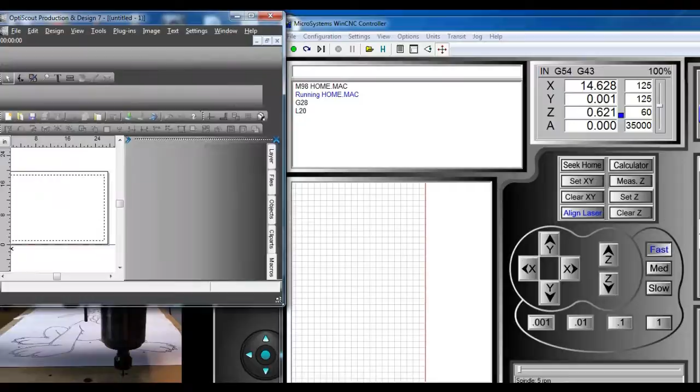Hi, this is Mike Queen from WinCNC, and today I want to talk about a program called OptiScout. We support this. This is a vision registration system.

This is where you would take a camera and locate registration marks on a print, and that would give you the placement of the item that you're going to cut. And you can see here I can twist this all around and position it, and I'm going to do that here in a minute. First thing I'm going to do though is just leave it straight.

I've got this tiny little tool here. It's an 1/8 inch V-bit, very sharp, and I'm going to use that for a pointer. I'm not actually going to cut my paper. I'm going to trace around it with the point on here.

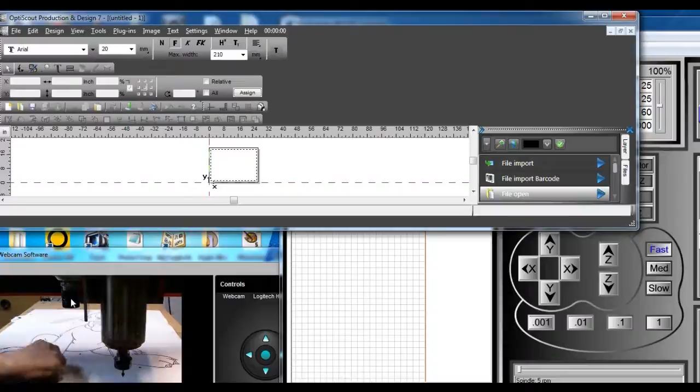After I find these reg marks, it's going to pick 3 of these reg marks and use them for placement. And then after I find 3 of them, it will determine where to lay out my outline for this, and then it will go around and trace over top of that outline with this tool. Then I'll twist it around at an angle and do it again. Wish it was a little smaller because I could get a better angle, but this will do to show you how it works.

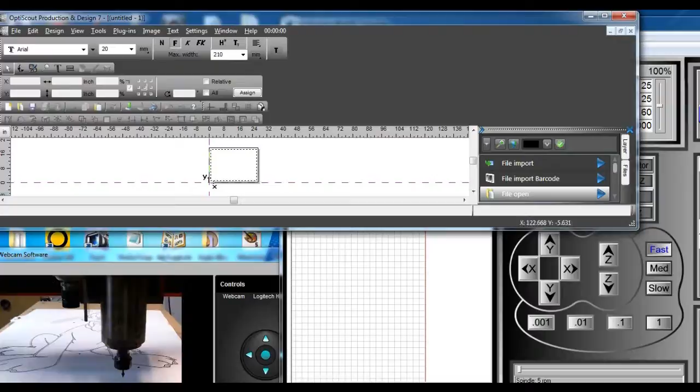So the first thing I want to do is to load the file that I want to use. So I'm just going to go to open file, and I'm going to grab this one and click it, and all this is an outline of the object that I've got down here, of this drawing.

And I'm going to use the camera to go around and find 3 of these reg marks, and then OptiScout will know where to place the toolpath for this, and then it will go around and simulate cutting it out. I'm not going to actually cut it out because I want to keep this drawing.

I would normally have set my tool at a real diameter, like a 1/4 inch for an end mill or whatever, and done it that way, but I'm not really going to cut it out, so I set a tool diameter of 0 so it would stay on the line.

So I'm happy with that, and the next thing that I want to do is to go ahead and output it to the device. And I'm going to shrink this so that it fits better on here so that you can see all the things that are going on.

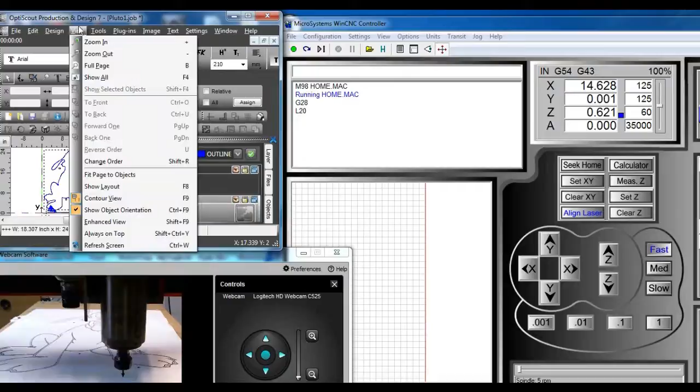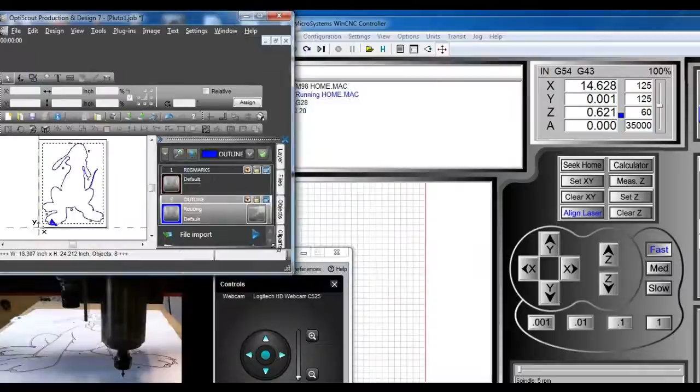Pull that back out for a second and turn off these rulers because they're taking up too much of my room. I want to shrink that down to where we can see WinCNC as it's copying, or as it's cutting, or simulating cutting.

And so now with this tiny drawing that I have here, you can still see the reg marks, and that's what the camera is going to look for on the drawing. And here's my WinCNC screen. Pull that over just a little bit more, and you should see it draw right here on the screen.

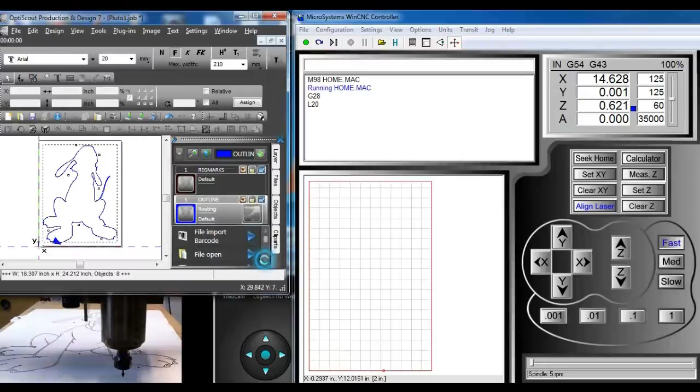Okay, so I want to output this to the file, or to the machine, I'm just going to click output, and we'll come over and look at this, and we'll look at the camera.

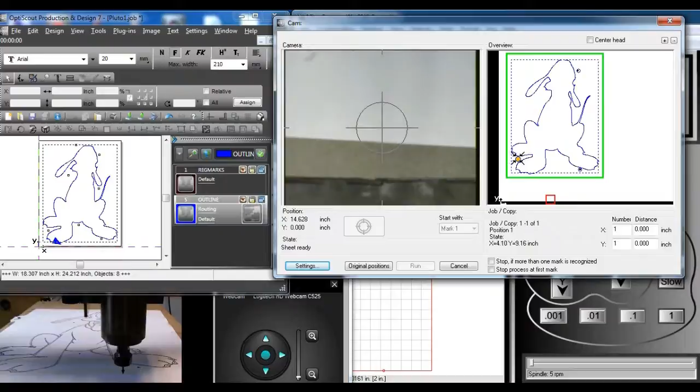And what I'm going to do now is I'm going to move it to this dot or in that vicinity. And it's closer than it was, so now I'll just take it down. And there is the dot that I want. That's the reg mark. That's a 1/4 inch black circle.

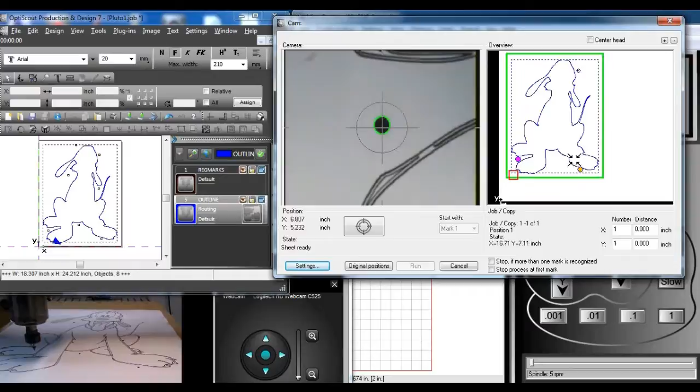When that turns green, that means it accepts its position. It knows where it's at. So now you can see that it's going to get this one over here, and this one up here. So I'll go ahead and tell it to accept that. All I've got to do is click this right here.

Now it's going to look for the other one, the next one. And it's a little bit off, so I need to move down a little. And there, it accepts that one. Now it should find the third one on its own. And there it did. Perfect.

Okay, so now all I've got to do is click run, and we should see it come up and bring the tool somewhere down in this area and start tracing around my drawing here. So I'll click run now, and you can watch it as it goes around.

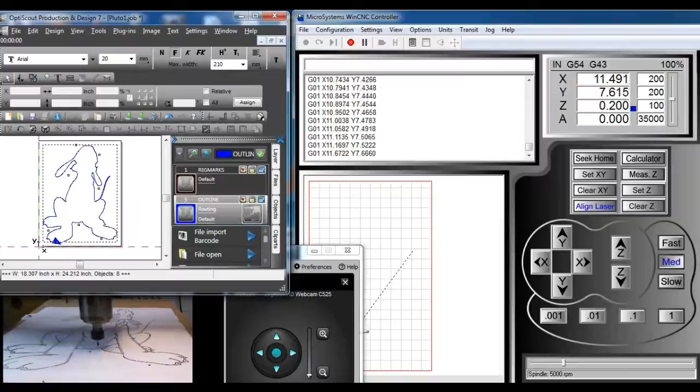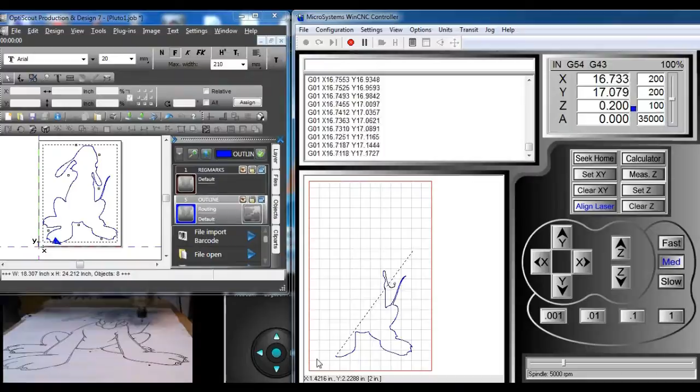I'm going to lower down right in here somewhere. You can also see it right here as it's drawing. You can see that it's tracing right around that outline of that dog.

When it gets back to here, it'll stop and lift out of the way. Now it's finished, and it was right on the line. Now, if you'll notice right here, he's leaning, and in this one, he's leaning a little bit to the right. Don't know if you can see it or not, but I think you can.

Okay, what I'm going to do now is turn this thing so that if it's going to be anything, it's going to be leaning to the left. I want to make sure that I can get it over far enough. I want to give it a good lean there. Okay, so I think that's good enough, and you can see that it's no longer straight on my table. It's very much catty-cornered, and that's what I'm trying to get across.

What it's going to do, if it does it right, is trace around it still, even though it's twisted around at an angle. When you see it finished here, instead of it being straight up and down like this or a little bit to the right, I think the head's going to be over in this area, and it's going to be angled in this direction. That's the only thing that I did, was move that around.

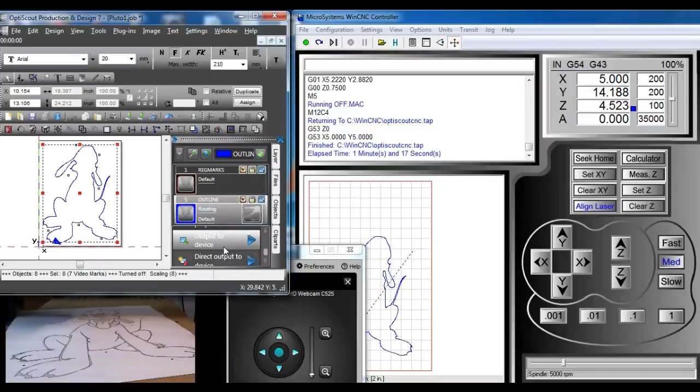So again, I want to go to output to device and let the camera do its work. Oh, I've got to select it first. Sorry, I've got to select it. Just come over here and go Control A, select it, and now I do that. And now I can output it to the device and output.

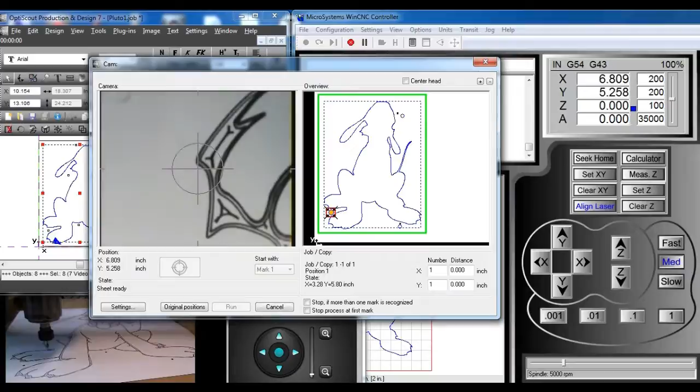And I will click here again. Camera comes down in the area, but it's not on because I moved it away. So there's my mark. I'm moving a little bit too fast, so I hit F2, then I can move slowly. Okay, so now it's located that one.

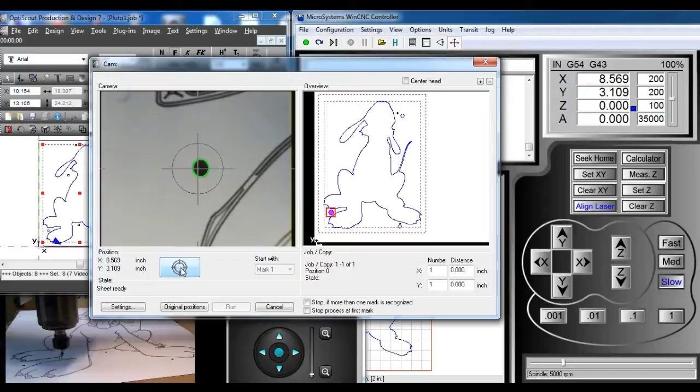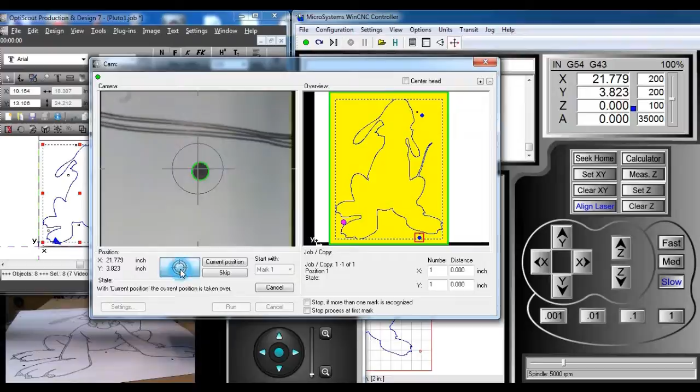It will not find the next one either because I've twisted it. And that's way off, so I need to move it up some. And a little more, and there's the second one. Now it should find the third one on its own. And it did, and it's ready.

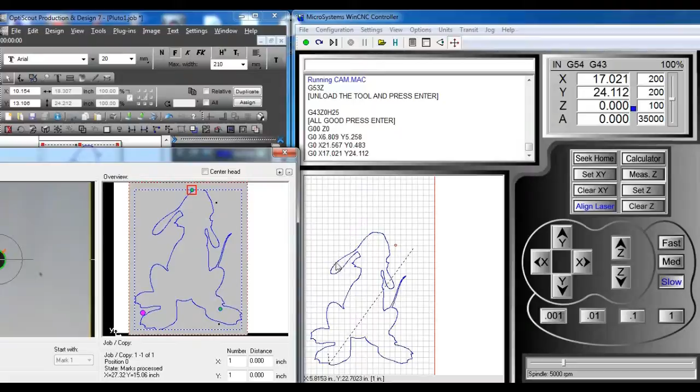Anytime it has that check mark there, that means that it's found it and it accepts that mark. So now all I've got to do is click Run. And before I do, remember, this is straight up and down, this is straight up and down. But when it's finished this time, it should be angled over in this direction. Maybe not as drastically as I showed you there, but it's going to be angled to the left instead of to the right, or vertical.

So I click Run, and now we'll come down and watch it here. And here, you can see that it's going down and it's going to trace around it, and you can see that it's still on the marks. It's still following the outline, even though I twisted it around at a pretty severe angle there.

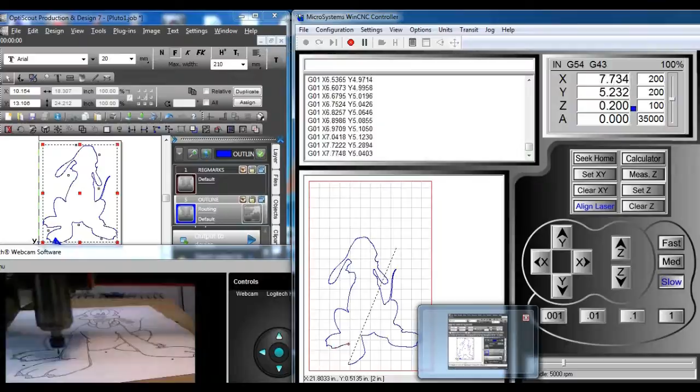It's still tracing right around the outline. You can already see that he's going to be angled up in this direction. And this is what vision registration does. It finds the reg marks, and then it can turn the G-code file in any direction that it needs to make its cuts. And there it's finished.

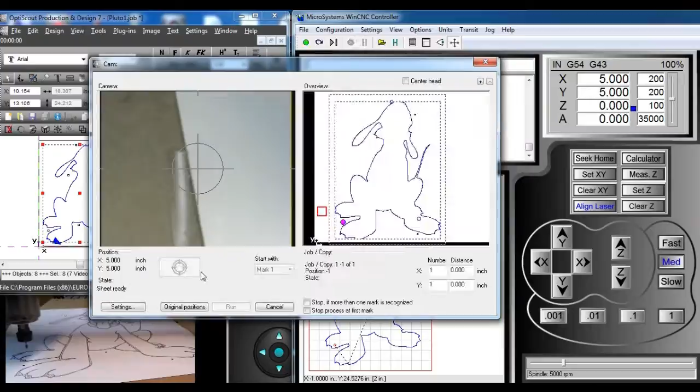As I said, it's very clear that it's angled to the left now. It was angled a little bit to the right, now it's angled to the left. So just to show you that it would do that same cut over again, I'm going to do the same one over, and now it finds that one. I hit here, it should find the next one, and then the next one.

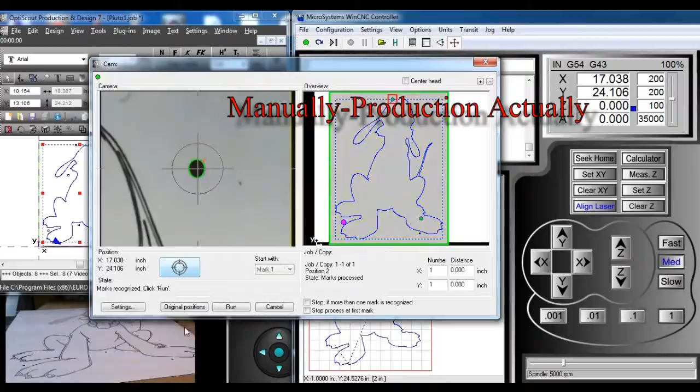Now I've got this thing set on manual, which means that I have to click Run for it to go, and I had to move it to that first spot for it to go. But if I had it on automatic, or on program I think it's called, it would do it by itself. It wouldn't need my help. So I click Run again, and we'll watch it as it cuts around the shape.

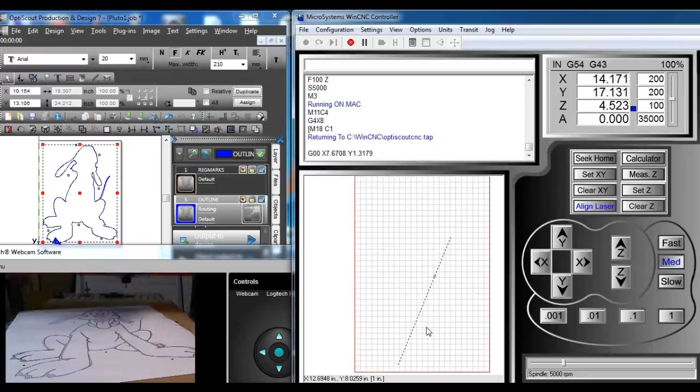You can see that it's tracing right on that outline, and that's what I'm trying to show you.

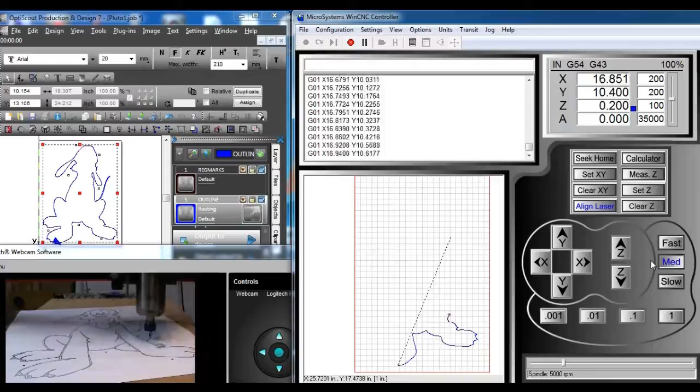This isn't a professional print, I just drew this one up with my CNC machine. But had it been, it would do it just as well. You can do color prints, cut things out to put on the walls, cut yard ornaments, whatever you want to do, as long as it's two-dimensional. It doesn't really want to do 3D work.

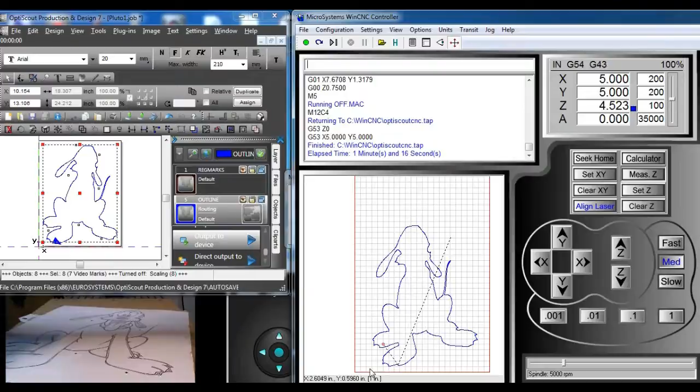And it's finished. You can see that it's still leaning to the left there. Okay, last thing I'm going to do is twist it around in the other direction a little. Put it about there, and I'll leave it at that.

But the next thing I'm going to do is come up here to my drawing, and I'm going to zoom in on this just a little bit so I can get hold of that arrow right there. That's the direction that the cut's going to be in. I think if I click that, it will go in the other direction. So now, instead of it coming around in a counterclockwise cut, it should go in a clockwise trace. So let's see if that happens.

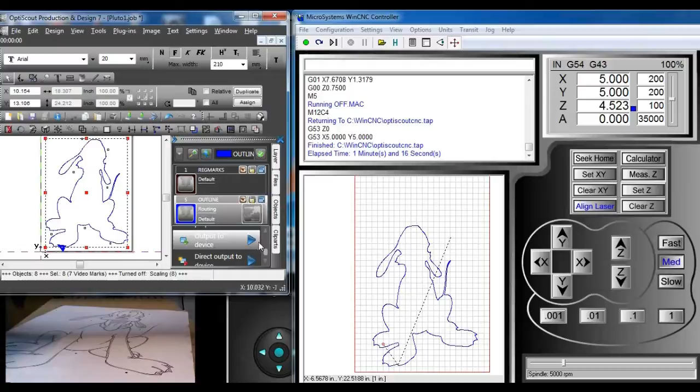So I'm going to pull it back out to where we can see the entire thing, and I'm just going to do the same thing again. Output to device and output.

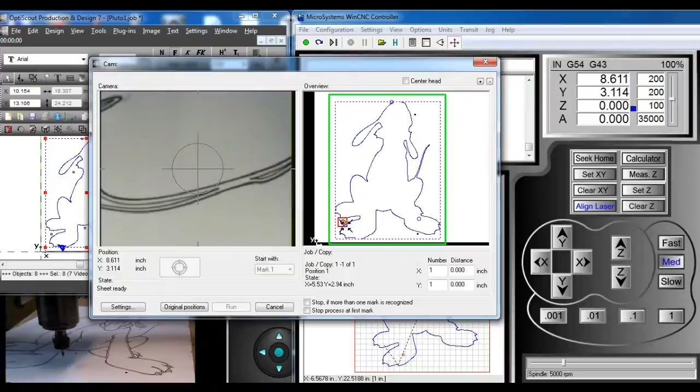Camera will try to find the mark where it was, but it's not there anymore. When I click the dot, it'll move to where it should have been if I'd still been in the same place, but it's not there anymore. So I've got to move it back, move it up, and we're getting in the area. A little farther up, I believe.

Yeah, there it is. If I hit F2, I can get a slow motion. Over, down, over, and there it's on. Now when I click this again, it's going to move over and try to find that other one, but it won't be there either because it's not in the same position that it was.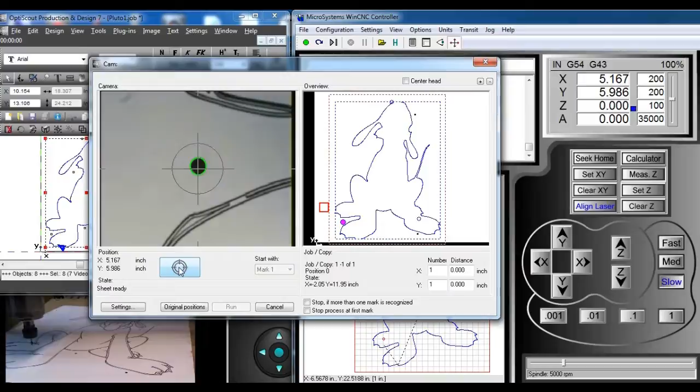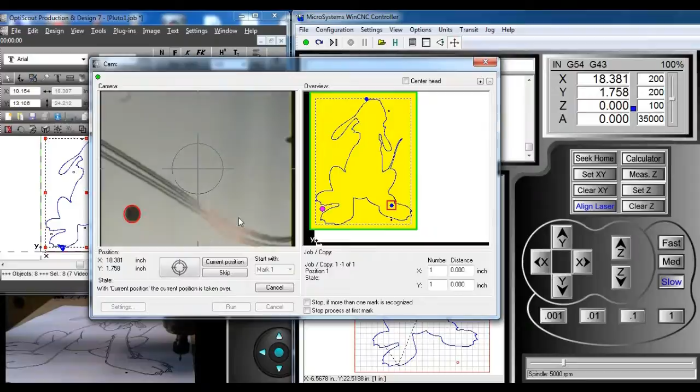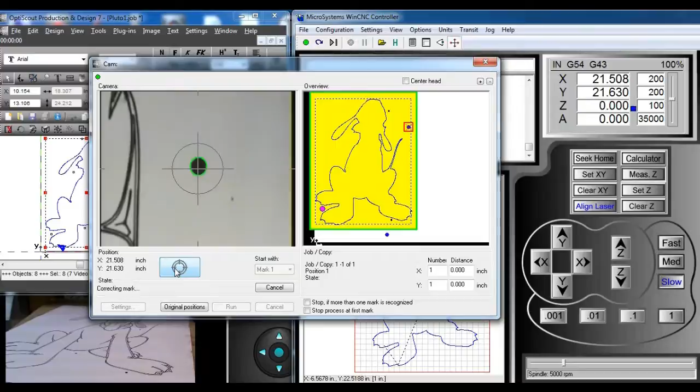And it doesn't find it, so I do have to move this one down. And there's my mark. And there it's on it, and it recognizes it. I hit the button, and it'll find the third one on its own. And that's good, and it's ready to run.

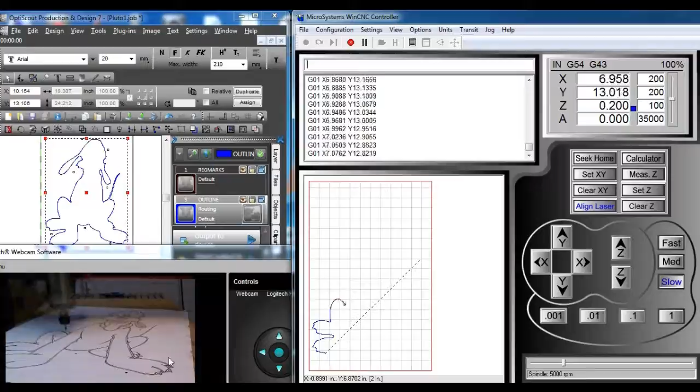That's how easy it is to change the direction of cut with OptiScout. You can see that my spindle with that tool is tracing right around it. You can also see up here, remember it was angled to the left before. Now it's going to be angled to the right.

And the last thing that I'll do is I'll set it up to auto run. And this time, since it already knows where the registration marks are, it should find those and do everything automatically. So that's finished. I come back over here and I will just click output to device again.

And this time, instead of manual production, I'm just going to go to production. Click output, camera should go and find the first reg mark and then keep on going. Found the first one. I'm not telling it to do anything now. It's doing this on its own.

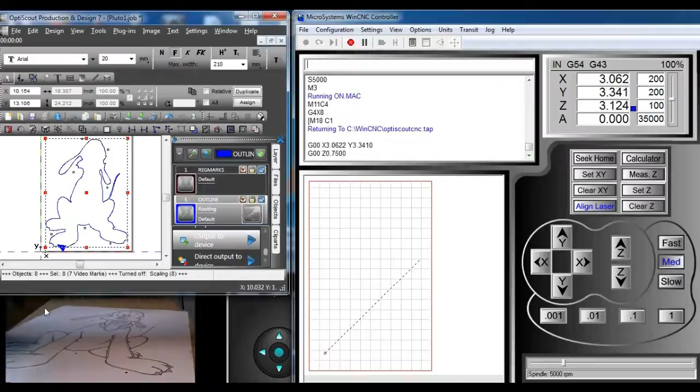Even though I have several reg marks on this picture, it only uses 3 of them. That's all that it needs for a shape. Now it's still going to go clockwise, but it's going to trace right around it, the same as it did before. But all of this one's automatic.

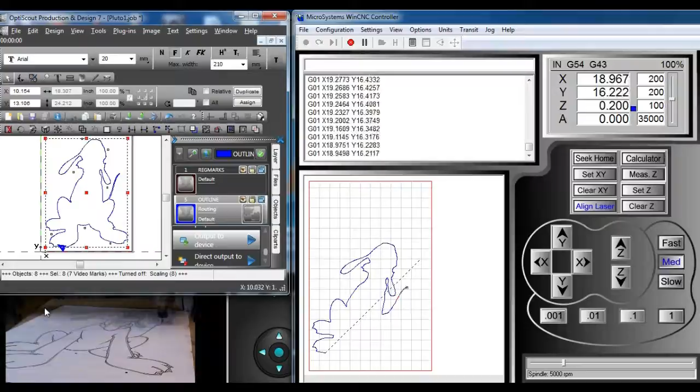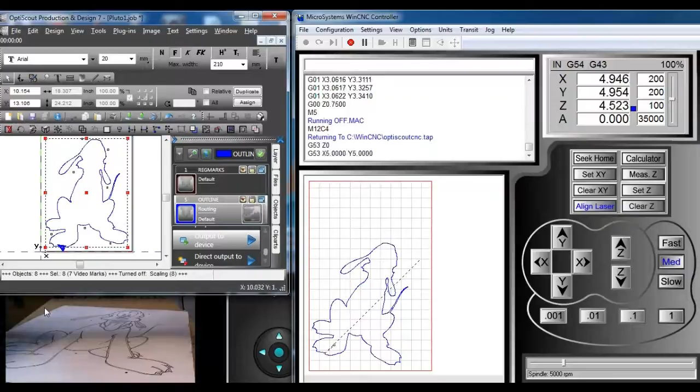And now it's finished, and I think that's all I'm going to talk about in this video. Thanks for watching.